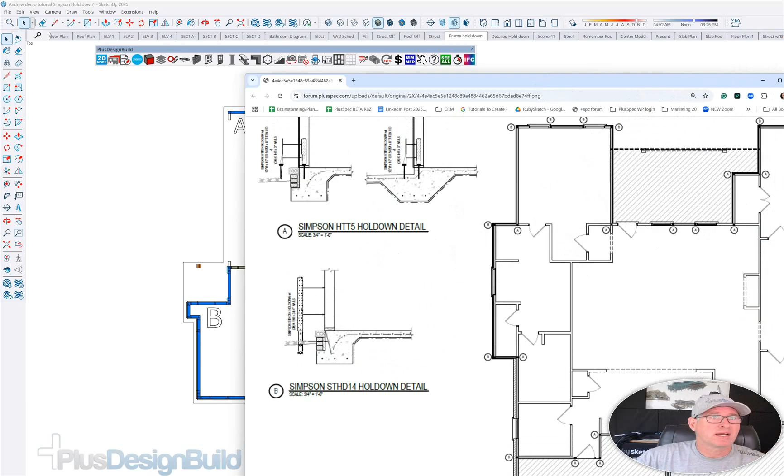This is from the forum. It's in regard to hold downs, and as you can see, we have a typical hold down detail showing where particular items would go. Now let's have a look at what those items look like.

I'm going to show you how to create labels, using two methods. But quickly, I'll show you what it is we're actually quantifying here. So this is a hold down, a special bracket to stop uplift, forces, or movement.

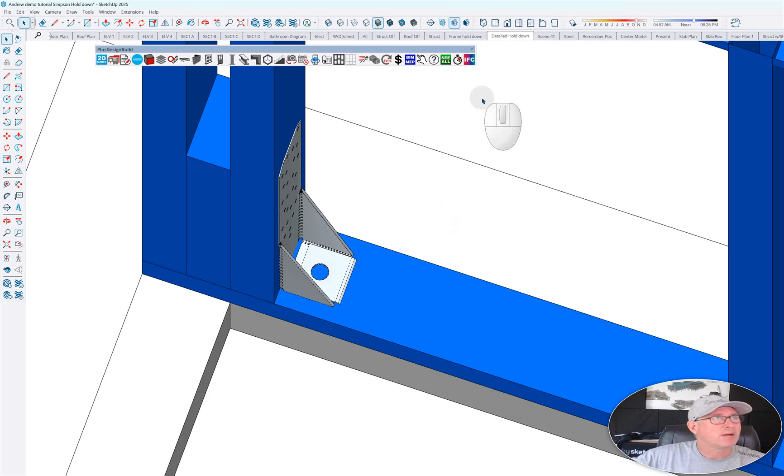It's made by Simpson Strong-Tie. We want to quantify these brackets, and we also want to show the subcontractor where they go. As you can see, I've got A and B here, and if I placed them around in this project, there's going to be one here, and one here.

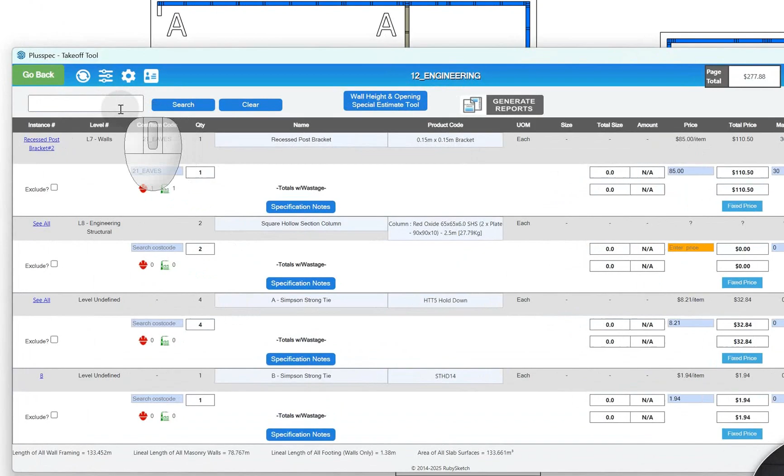We want to quantify these items. So if I clicked take off, it's going to take off the whole model. And then if I searched for Simpson, it'll find all the Simpson products inside the model. So you can see here I've got the hold downs, A and B, and it's showing me everything that is inside of the model, and therefore we can quantify and associate a price with it.

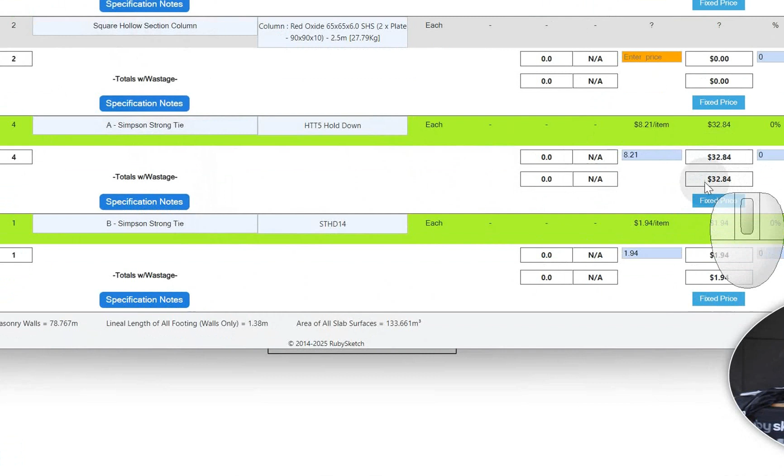However, it is just the symbol that is doing that. So if I right click, take off, selection only, you'll notice it's only going to come up with just that one item, which is the Simpson Strong-Tie STHD14, one of them at $1.94 each.

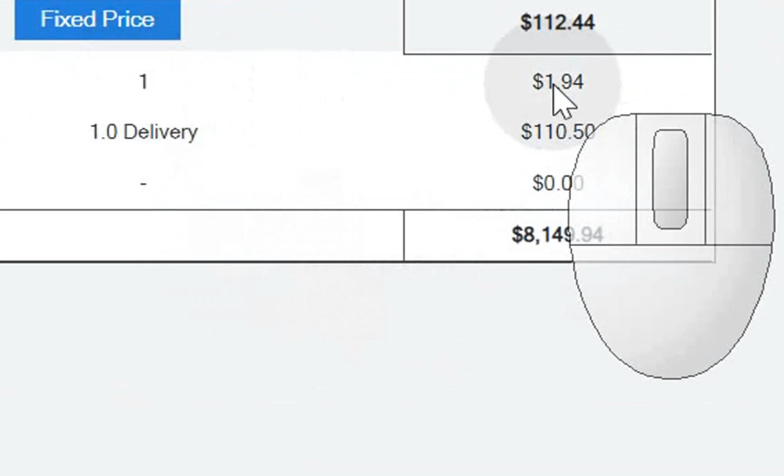If I added multiple, obviously we're going to have multiple items. So I'm just going to move, control, copy over here, and we're going to have one here and one here. That way, if I selected take off selection only, we would have three of them in our engineering section.

I'm going to show you how to get them in the engineering section, and I'm also going to show you how to create these. Now, I'm also going to tell you why I believe that just the symbol is sufficient.

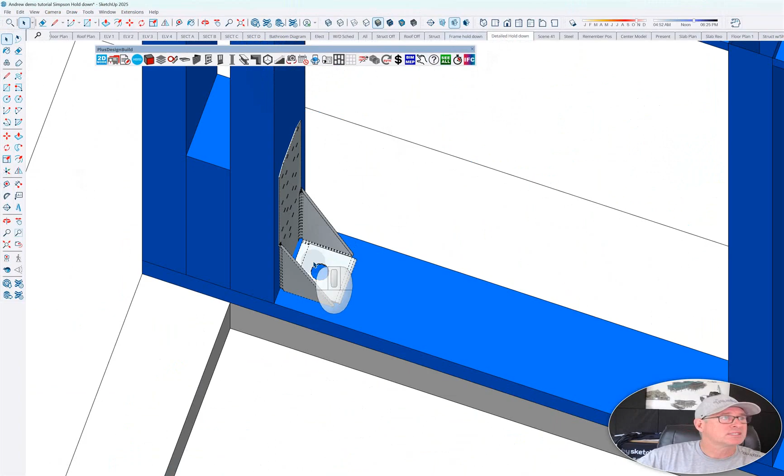And why I would not go about doing this. The main reason, guys, I'll hit it now: I'm not going to import all of these brackets.

I might do it in a vignette, which is a detail that shows just a part of the model, but I'm not going to put this amount of excess geometry inside the model, because this connector is probably holding more lines and faces than the whole frame is. That's insane. We don't need that level of detail when we're doing a building information model.

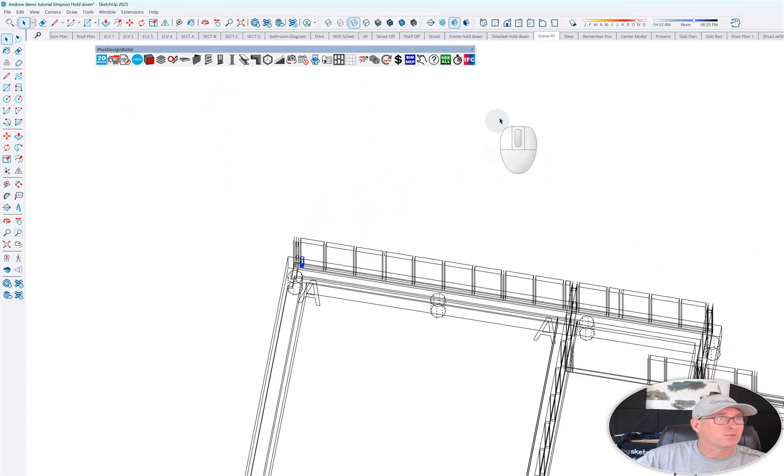So what I'm going to do is show you how to use a symbol instead. You can see I've got A and B already done. What I have here is the large tool set open. You can get that by right clicking and choosing large tool set, but I've got it open here, and you can dock it, which I do recommend that you do.

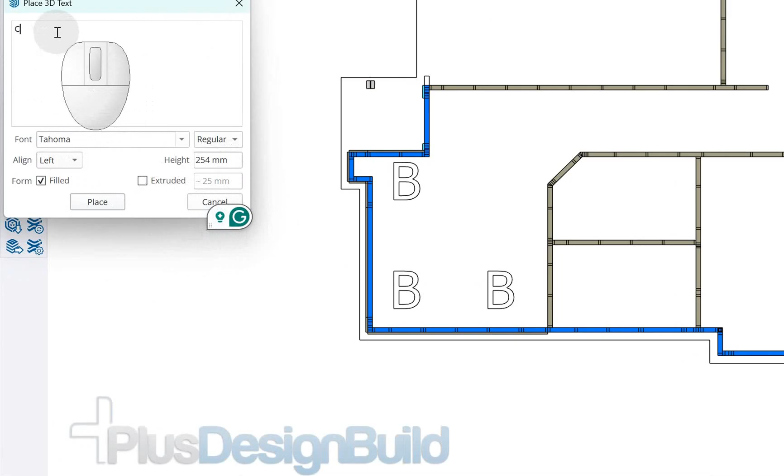Now you can go in and choose 3D text. You can extrude it and make it into 3D, but personally, I don't recommend it, so I don't extrude it. You can choose a height and place it. So let's make this one C. All right, place - I'm going to place the C over here.

Now, it doesn't know anything about it, so if I right click, take off, selection only, it's going to be blank.

There's no engineering product in there, but I want to make this into another Simpson Strong-Tie product. So what I've got over here on the right is the Simpson Strong-Tie website, and I've just gone in and chosen which product I want.

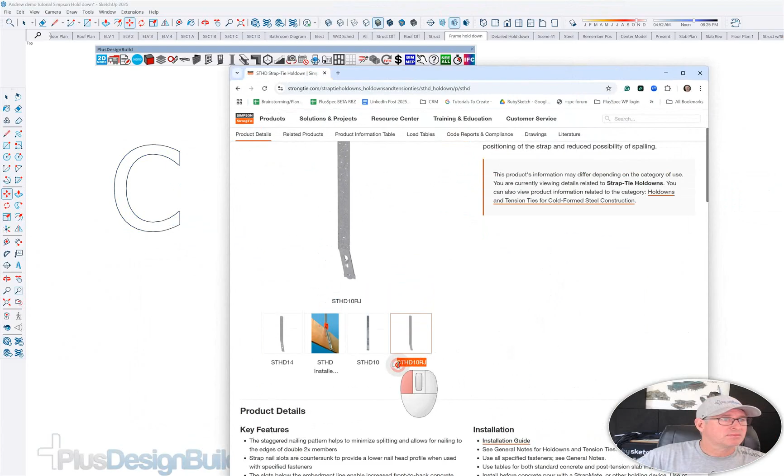Now, obviously, guys, you're going to do your research on this. I'm going to select it, and because I have Plus Design Build installed, I can right-click and make BIM component. I'm also going to save this, leaving it named C, but giving it a product code by pasting in a code I copied from the Simpson Strong-Tie website.

I'm going to quickly type in Simpson Strong-Tie here. I'm also going to save this so I can use it next time — I'll show you how I do that in a second. And I'm going to choose where I want it to be on a layer.

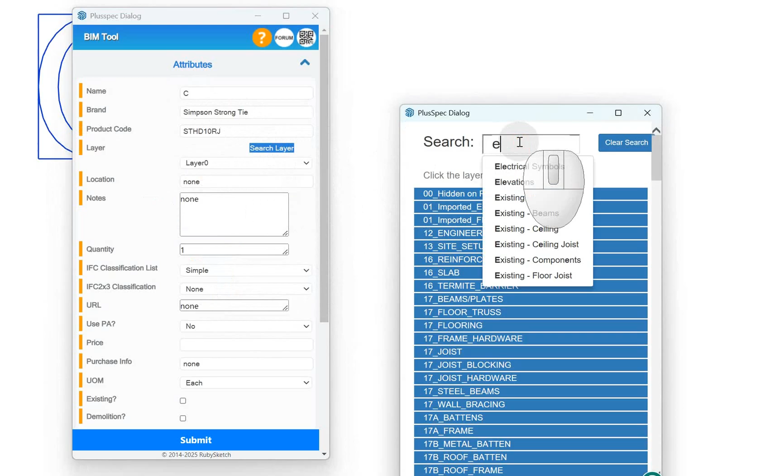So I'm going to click Search Layer, and click on my Engineering layer. Okay, that's the layer I want it on, so it'll show up in my takeoff underneath that area, but it'll also show up in my model when I select certain scenes. I'm going to give it a price — let's just say it's $4.44.

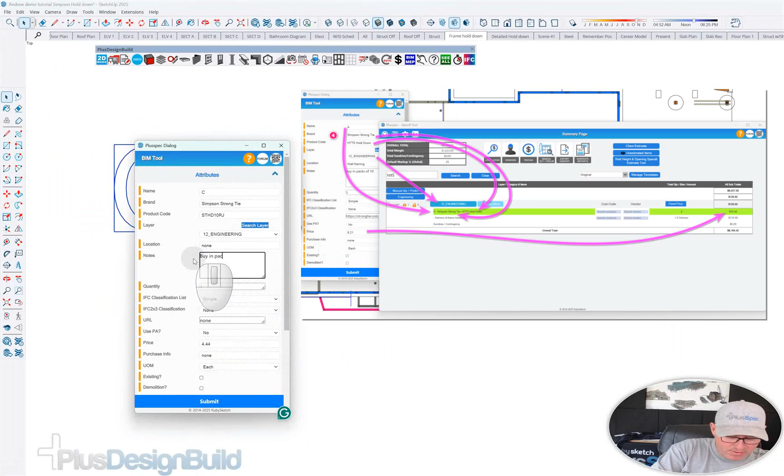You can write details about them — buy in pack of 10, right? You can add more information about it and the price, and go submit.

Now I have this, I can right click and save out to device. You'll notice I've actually created a folder called Engineering here, and inside it I've got hold downs. So I can go in here and paste the name of it — hold down strap, whatever it is. Guys, just make sure you type in what you understand it as, or how you would order it.

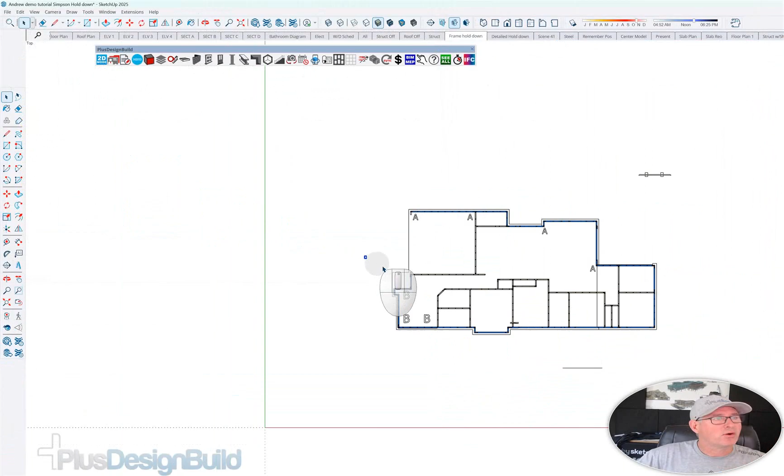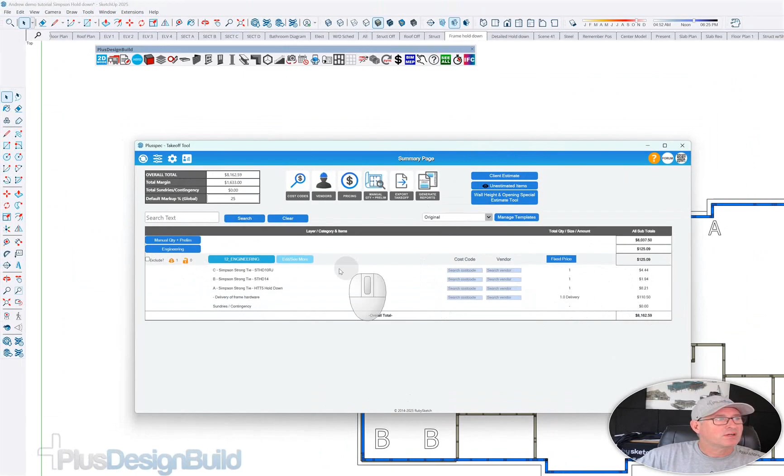That way, next time I start a model, I can go through and do it. You'll notice now if I just select them individually, and this one here, I can go right click, takeoff selection only, and I'll have under my Engineering section A, B, and C. I've also got my price associated with the number, and it's counted them in there. I only selected 3 — however, if I selected the whole model, it would tell me how many items are in the model.

Having that letter in there is so much better than actually having all that detail we showed before, because it would make our model too heavy. It's like having a truck and sticking 5 pallets of bricks in the back if it's not necessary — you get a delivery, right?

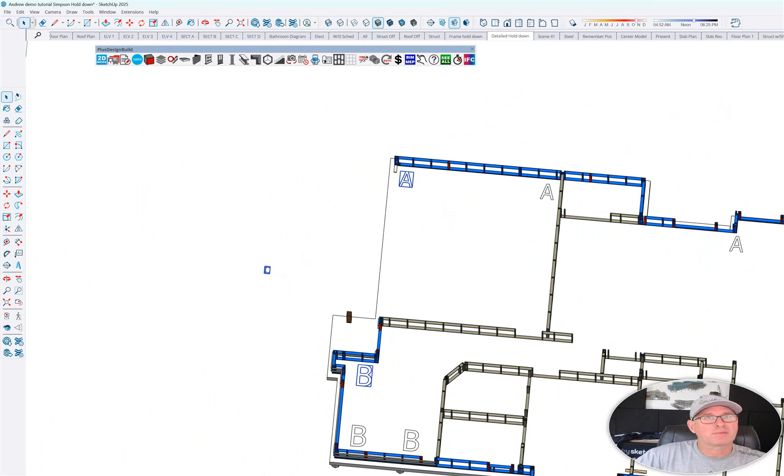Okay, so now that is saved out, when I actually open up — I'll see if I can grab this over here for you — when I'm inside a new model, I can go through and just choose which particular items I wanted out when I go to my components. You can see I've got Engineering there, hold downs, and then I have my symbols.

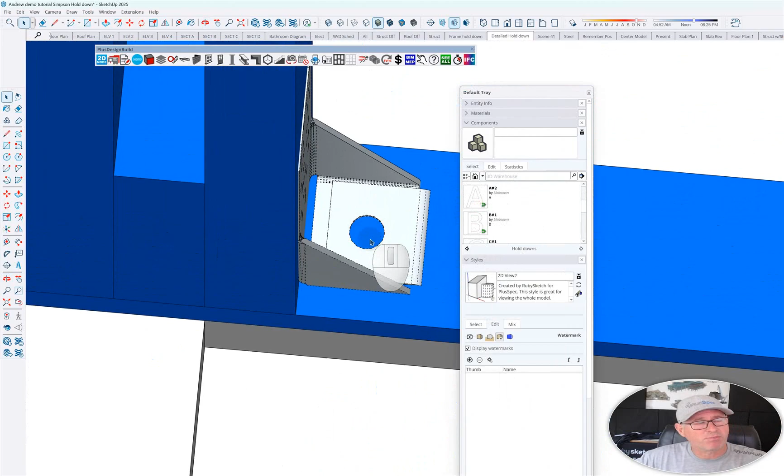You can also associate — so say for instance, it does appear as though this particular item here must come with some type of 1/2-inch bolt that ties it down. You can associate different items with A, so I could go and put a rectangle in here, or a square, or whatever.

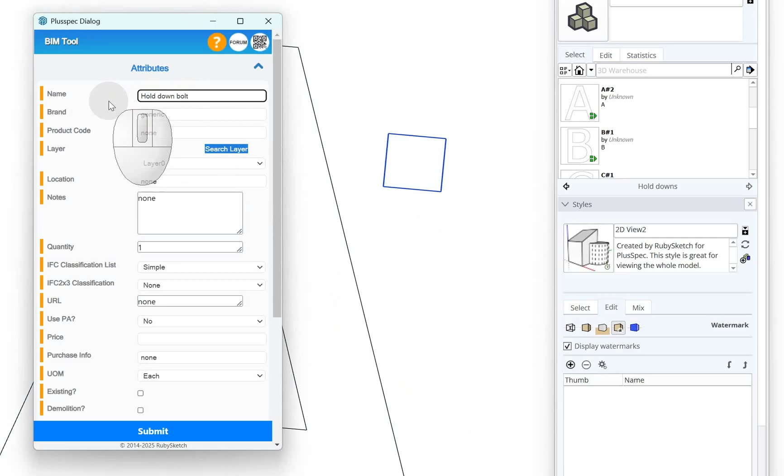Let's say rectangle here, and I can use my BIM tool, make BIM component, to be a hold down bolt without having to draw the whole bolt — doesn't make sense. I'm going to say 1/2-inch, and it could be by a supplier, but more importantly, I just want to make sure it's in the area that I want it to be.

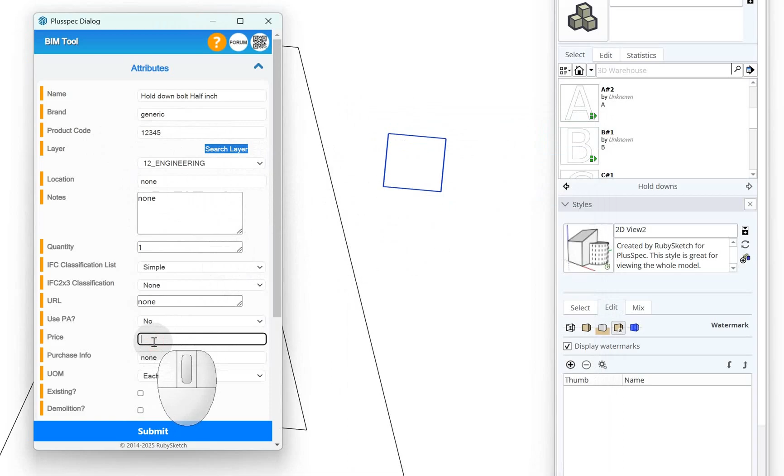So engineering here, right, and therefore it'll show up in my takeoff with this particular item and product code. I'm just making this up, 1, 2, 3, 4, 5, but you're going to have something there. And the price that you would associate with this bolt, I'm going to say it's $1.25. Submit.

Now what I can do is make both of these items, or multiple items - it could be that you need nuts, bolts, washers, and they're all built separately - but I can select both of these items, right click, and just make it a component. I'll call it hold down assembly, probably poorly typed, but you get the idea.

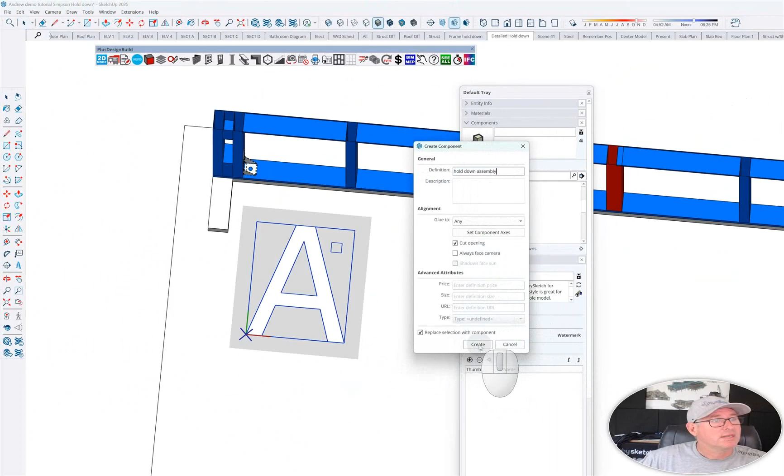Create, right? And therefore, instead of having this and that, I would just go through and delete these. If it's always going to need that little bolt, I'll delete that, and then just move and reuse this one here. So move, put it wherever it is I want it to be, and now I'm going to have a hold down assembly.

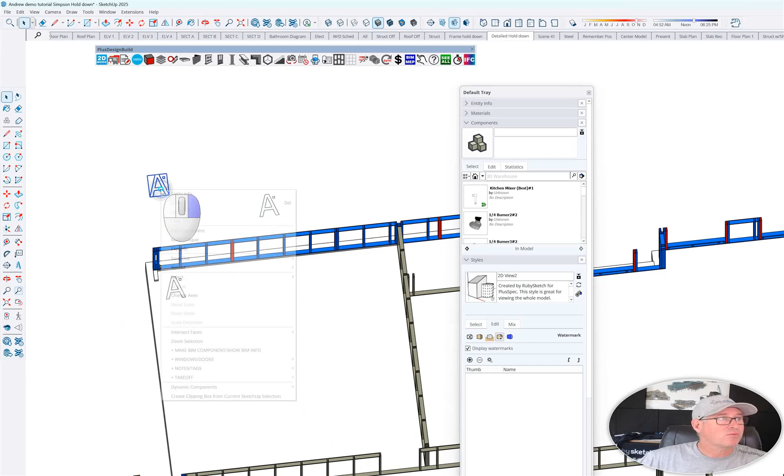Could be multiple items. If I take off one, right click, take off selection only, engineering, right? I have the hold down bolt, 1/2-inch, 1, 2, 3, 4, 5 at $1.25, which I put in there. You would save that.

So you would save assemblies. Don't save individual items so you have to add a bolt, a washer, and a nut. Create assemblies and then save them into your components.

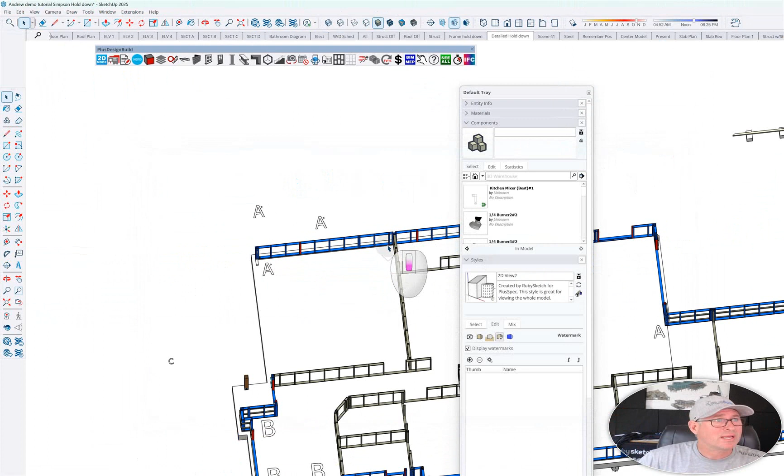You can also save them into your vignettes. Now I'll quickly explain that. Let's just grab another, let's go here, components, vignettes - I think I have a wall vignette, some multiple vignettes here. Let's just choose this one here. Put this one in here.

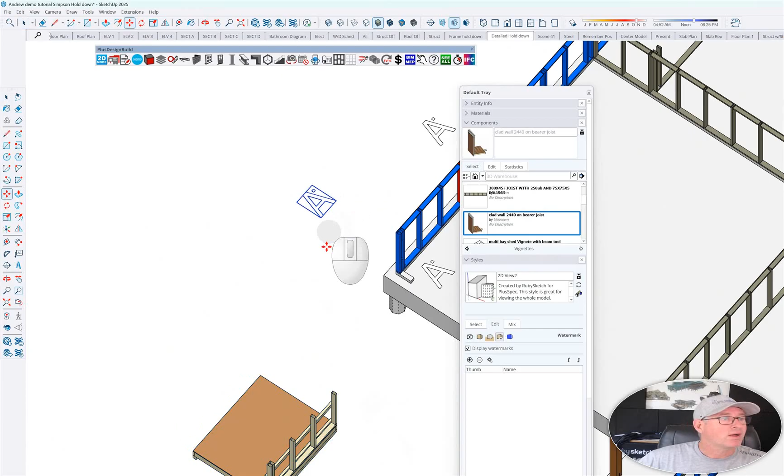Now what I could do is, knowing that I would always use a particular item with a particular bolt, I can grab that and put it inside of my vignette and resave my vignette. So every time I do it, I'm going to have the Simpson Strong Tie hold down and the bolt associated with it. The way I would do that, I'm going to explode this because it's already a component.

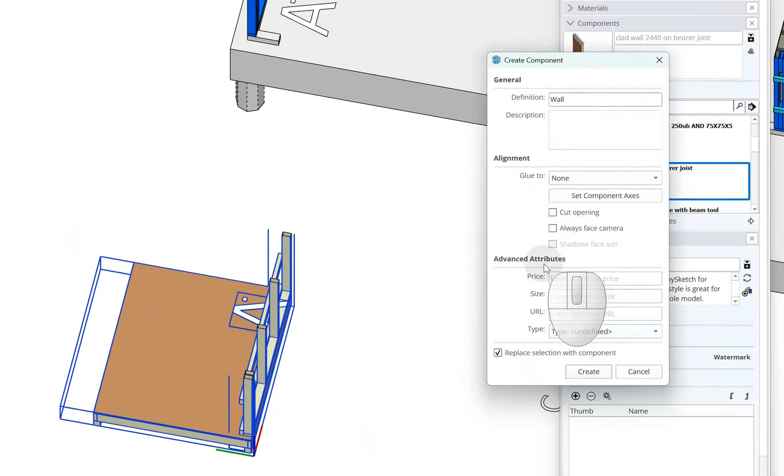I'm going to rename it, right click, make component, and then call it wall, the height of the wall, assembly, and whatever it is that will help me remember this. I'm going to create it, and then right click, save out to device.

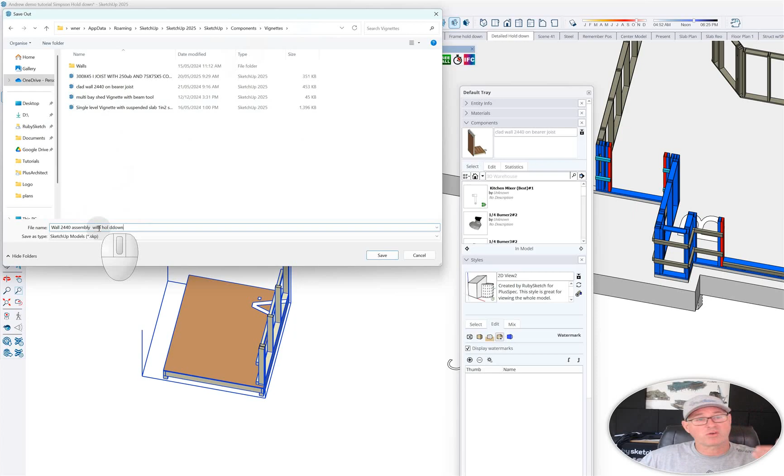I'm going to put in the location - remember the last location, so I don't want to go there. I actually want it inside of my vignettes assembly, and I can type 'with hold downs' or whatever. That way, next time I want to create the wall, I just right click, create similar wall, and it will create that wall for me.

So I'll go inside and show you. Right click, walls, create similar wall. Right, wherever it is I'm going to do it, there we go. Okay, so that's created and copied the attributes of this wall.

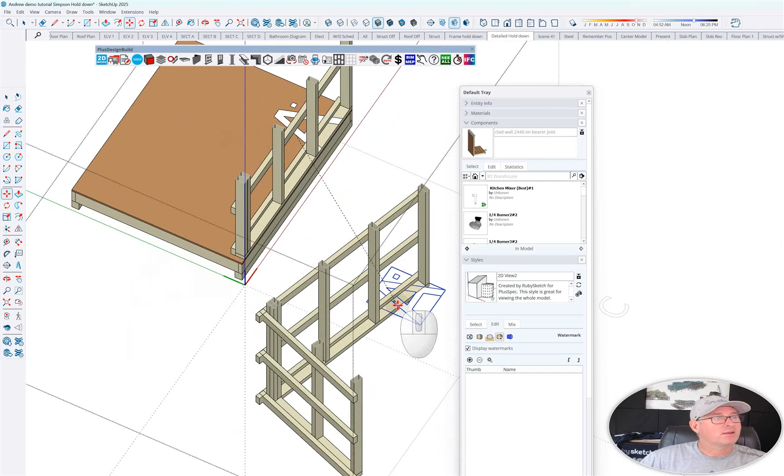And when I wanted to grab my hold down, you can see that I can grab my hold down, and that way when I go back to my hold down details, now I can see them the way that I've drawn.

Now, guys, you can see I was just messing about, but I just want you to get the idea that you don't have to use detailed geometry to be able to quantify something. If you don't need to see it and you only need to see a symbol, this is the best way to do it. I hope it helps, guys.